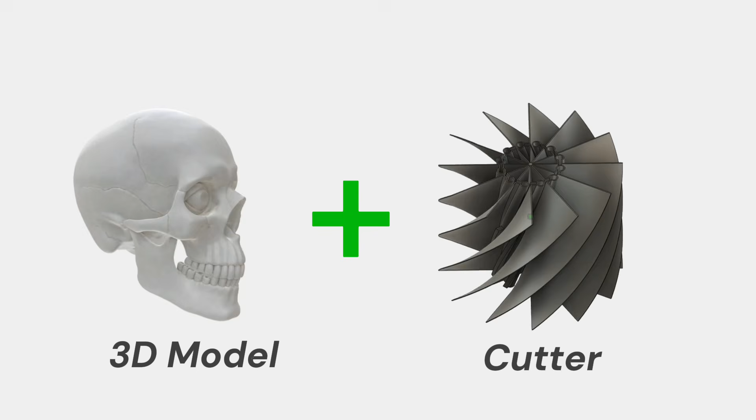Now check it out. I built this strange looking cutter, and in this video, we're going to test the whole workflow together. Can we take a 3D model, work only inside the slicer, and turn it into a twist fidget without opening any modeling software? If this works, it opens up a lot of possibilities.

So let's get started. I'm starting with a simple pumpkin image. We'll generate a 3D model from it, bring it into the slicer, and try to turn it into a working twist fidget without opening Fusion or any modeling software. There are tons of tools out there that turn images into 3D models. Most require credits or offer lower quality free versions.

For a quick demo, I'm using the Image to 3D feature in MakerLab on MakerWorld. Scroll down to Image to 3D model and drag our pumpkin photo in. You can toggle between different models to see which one works best for you. That's it. Just upload your image, pick a model, and join the queue. Okay, it's done.

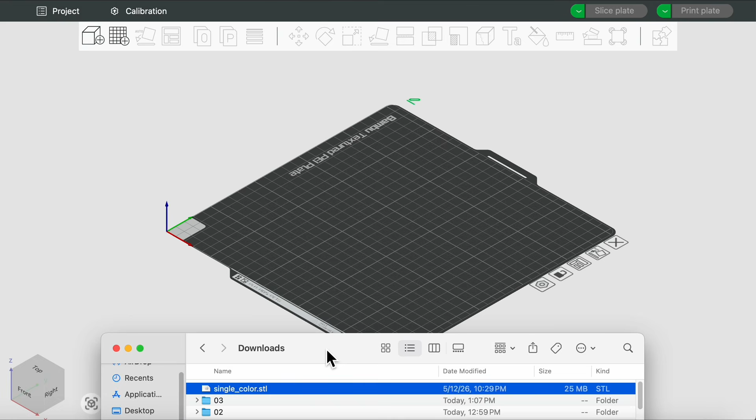If you like it, just go ahead and hit export to get the mesh. The cool thing is that it only uses credits when you export. That's reasonable, right? Choose STL and download it. Now let's drag it into the slicer. I'm using Bambu Studio here, but other slicers should work in a very similar way.

The generated model is sitting at an angle, so let's level it out first. Find the rotate tool, adjust the rotation until it is roughly level on the build plate. Check it from another view as well. That looks level. Okay. To fix the large overhang issue at the bottom, select the model and use the cut

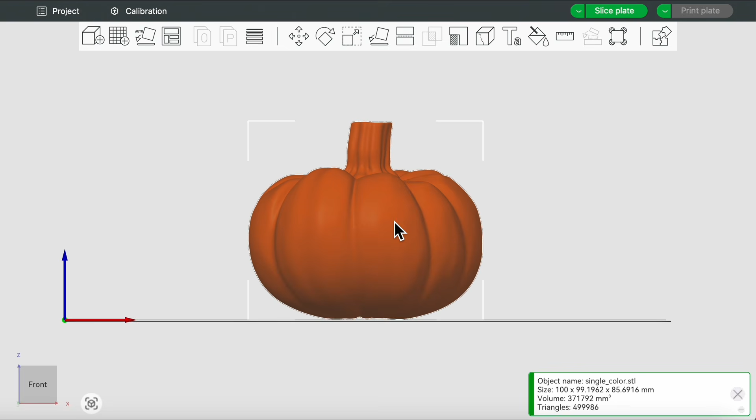tool to slice off a small section from the bottom. Right around this position, the starting overhang angle is about 45 degrees, so it won't need extra support. And don't forget to delete the bottom piece.

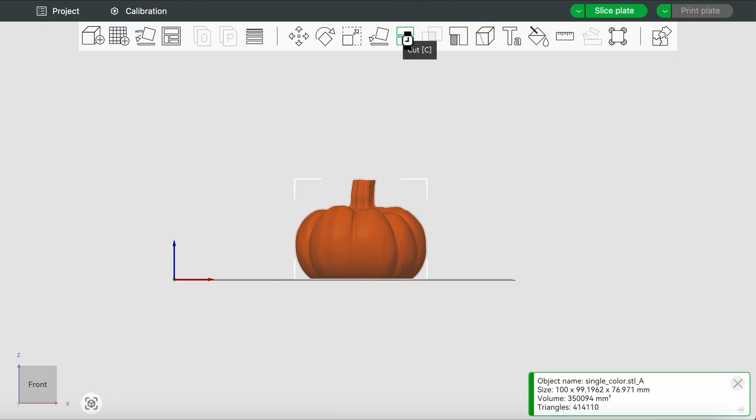I think the pumpkin stem is a little too long, so let's trim it down a little. About here. Delete the extra part. Before we make the cutter, we need to know the size of the pumpkin it has to pass through. The model information is in the bottom right corner.

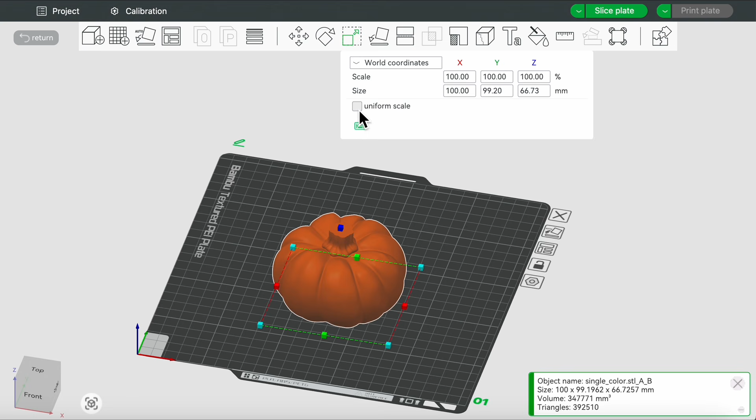For a quick test print, I'm going to scale it down a little bit. Find the scale tool. Here, you don't need to keep uniform scale checked. I'll set this dimension directly to 75 by 75 by 50. Now we can build a cutter around this specific size. It needs to cover the pumpkin without destroying the details we want to keep.

I've uploaded the cutter as a parametric model on MakerWorld. You can open the link in the description, click Customize, and generate a cutter that fits your own model. There are only 4 parameters, but each one controls a different way the print can fail.

First is the diameter. It must be slightly larger than the widest point of your model. This pumpkin is about 75 millimeters across, so the default diameter of 80 is fine here. If your model is around 90 millimeters across, enter 100 here so the cutter extends past the model and cuts all the way through every section.

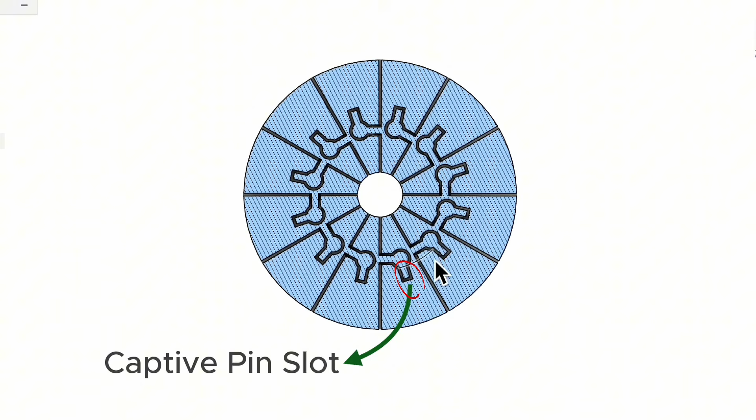Next is the height. It must be slightly larger than the total height. The height of our pumpkin is 50 millimeters, so I'll change this to 60. This next value is the one that can quietly make or break the fidget. Pin slot height. It controls how high the internal captive pin slot goes inside the model. If it is too high, the slot can break through the surface. If it is too low, the pieces may not have enough room to slide.

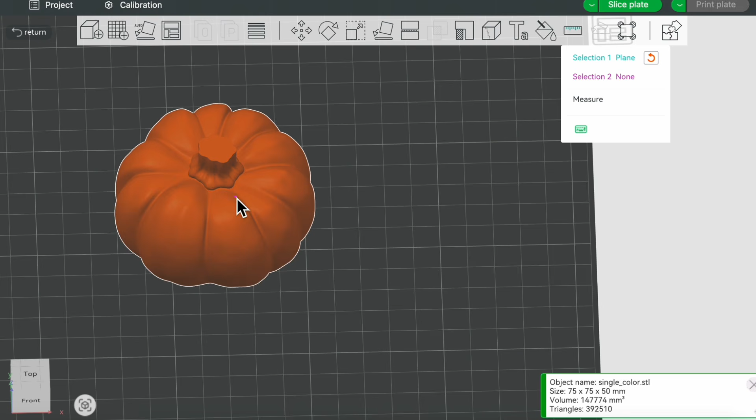We'll measure this height on the model. Click the Measure tool. First, select the bottom face, then find a relatively low point near the top of the pumpkin. Here it shows 39.1 millimeters. We'll subtract 2 millimeters from that value. Enter 37.

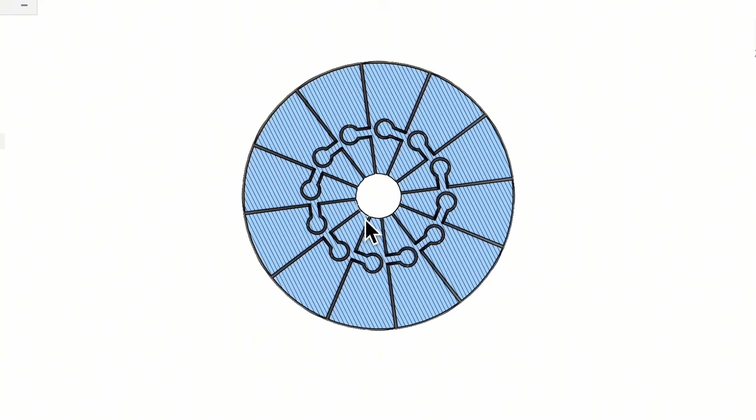The last value controls the center hole. That small opening matters because it helps keep the inner tips from fusing together during printing and reduces friction when the parts twist. As you can see, our pumpkin has a stem sticking out from the top. If the core diameter is too large, it might cut away the entire stem, and that whole detail would disappear. So if you want to keep the stem, use a smaller core diameter. I'll set it to the minimum value, 2 millimeters.

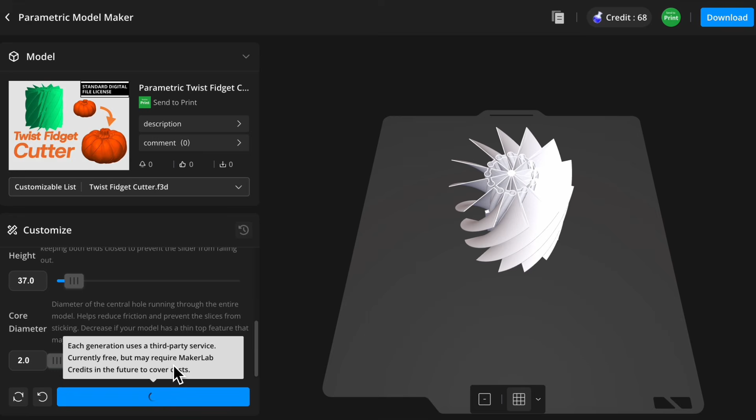Click Generate. This is a third-party service, and the generation may take a little while. At this point, those 4 numbers carry all the decisions we just made: size, height, internal slot, and center clearance. Okay, the model is ready. Let's download it. You can choose either STL or 3MF here.

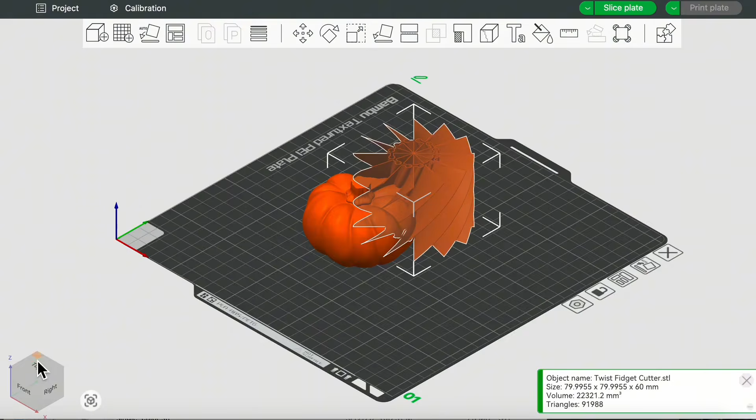Now, drag the cutter into the slicer. I'll switch to the top view so it's easier to align everything. Move the pumpkin roughly to the center of the cutter. It doesn't need to be mathematically perfect, but it should be centered enough for the twist structure to work. And make sure the whole pumpkin is inside the cutter so the cut goes all the way through.

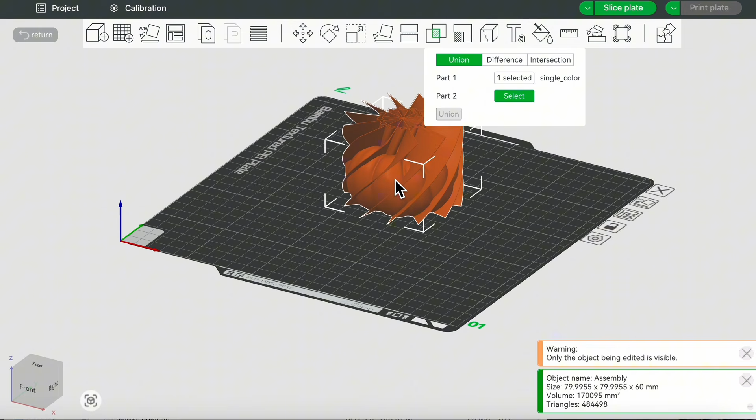In Bambu Studio, I need to merge the pumpkin and cutter before running a Boolean operation. Then I open the Boolean tool, select the pumpkin as the main body, and the cutter as the cutting tool. Choose Difference here. You can check Delete Input since we won't need the cutter later on, then run the cut. This is the moment of truth. If the cutter is wrong, the internal mechanism will either break through the surface or fail to form properly. This may take a little while because the Boolean calculation is pretty heavy.

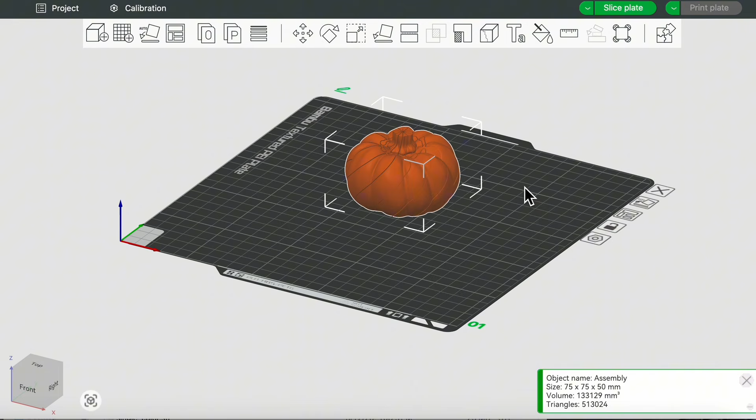Okay, it's done. Time to see if it worked. The first thing I check is the top surface. The internal slot should not break through here. If it opens to the surface, the slices can escape instead of staying together. Now let's slice the model and look inside. The internal slot is there, but it does not break through the surface. That means the slices can slide, but they cannot fly straight out.

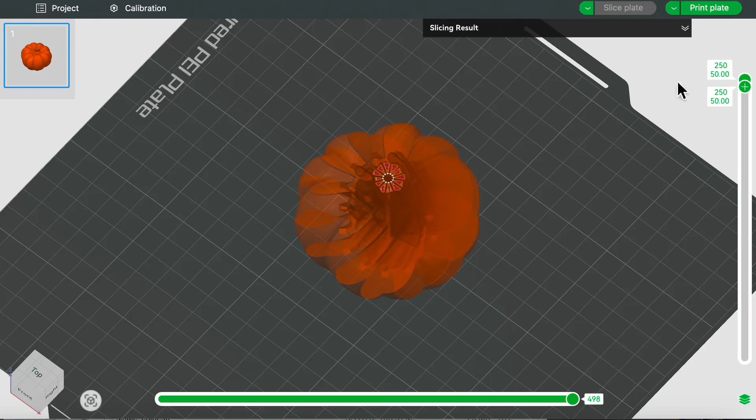Let's check the bottom too. Great, this side is also closed. I think our little cutter works well for this pumpkin test. Okay, send to print. While the printer is doing its part, let's turn this test into a quick checklist. What kind of model actually has a chance of becoming a twist fidget? From this pumpkin test, the pattern is pretty clear.

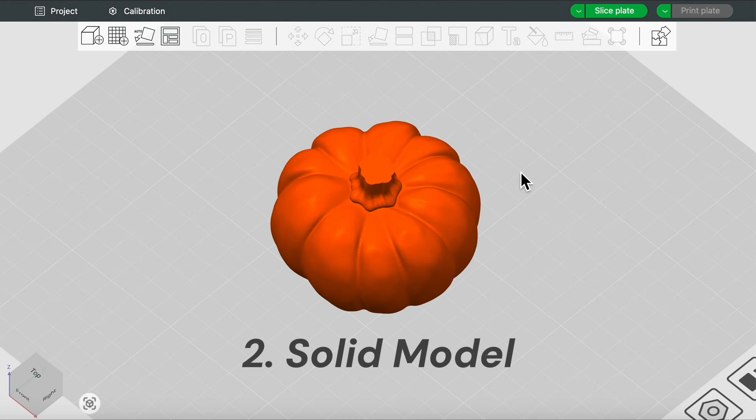First, a flat bottom is ideal so it can sit directly on the build plate. Second, the model needs to be solid inside. Do not use a thin hollow shell or the Boolean operation may not create the mechanism correctly. Third, aim for a height of at least 50 millimeters. If the model is too short, the slices won't have enough room to slide and the fidget won't feel as satisfying.

The horizontal size matters too. You need enough material around the center axis to support the sliding mechanism, so I recommend at least 60 millimeters across the XY plane. The other question is how much cleanup you are willing to do. If you want to avoid supports, watch the overhangs from the bottom up and be careful with deep recessed areas like eye sockets.

Finally, pay attention to the size of the details on top. If your model has a long, thin feature like this pumpkin stem, make sure it is thick enough and use a smaller core diameter. Otherwise, after the Boolean cut, you may end up with very thin areas that are easy to fail during printing, or the stem may be cut off completely and the detail will be lost.